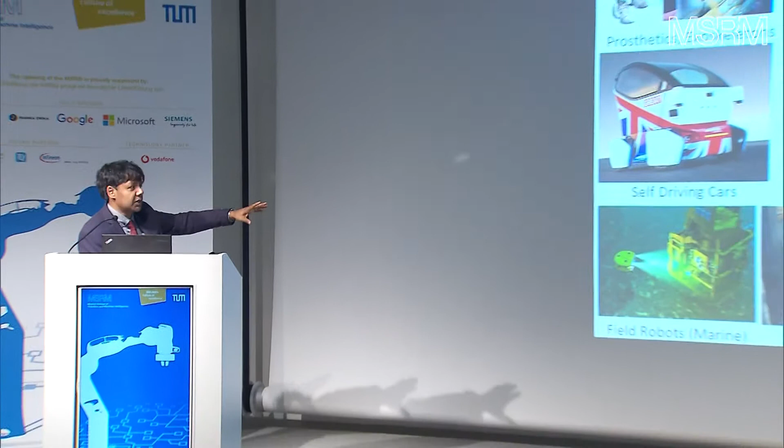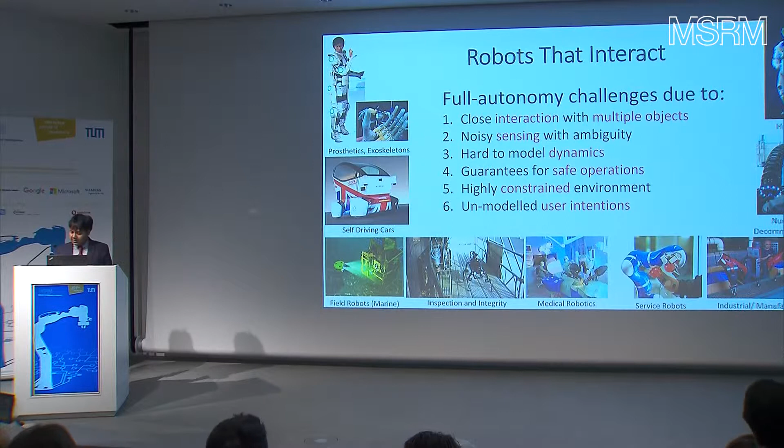What is different, and many of you have already addressed this, the classical ways of doing robotics has reached a limit because of many of these challenges. If you look across the domains, these are roughly the domains that Edinburgh Centre for Robotics works on. There are significant issues, if we wait for full autonomy to work in these systems, we're going to wait a long time. So to address these things, we've been looking at several domains.

What I'm going to do is give you examples of 3.5 projects, so I have time for 3, I think, and tell you a little bit about the science underlying that.

The first one is what I call shared autonomy for remote ops, or remote operations. You can imagine scenarios where you want to send a robot into a fairly dangerous radioactive setting. The whole point is you want to be away from the line of sight. You need to have scenarios where it works without reliable communication.

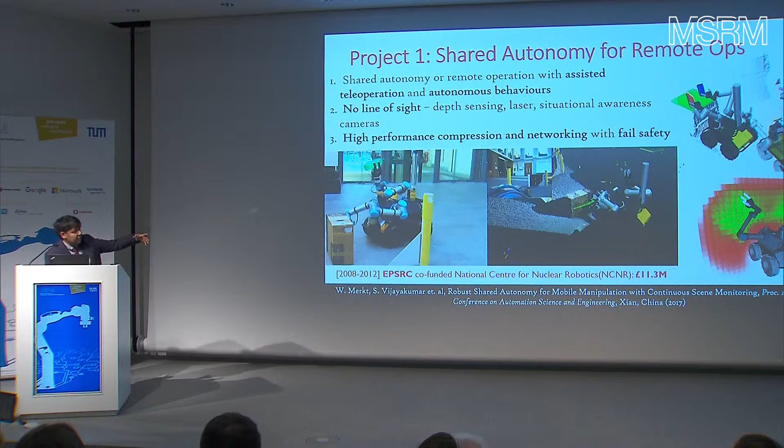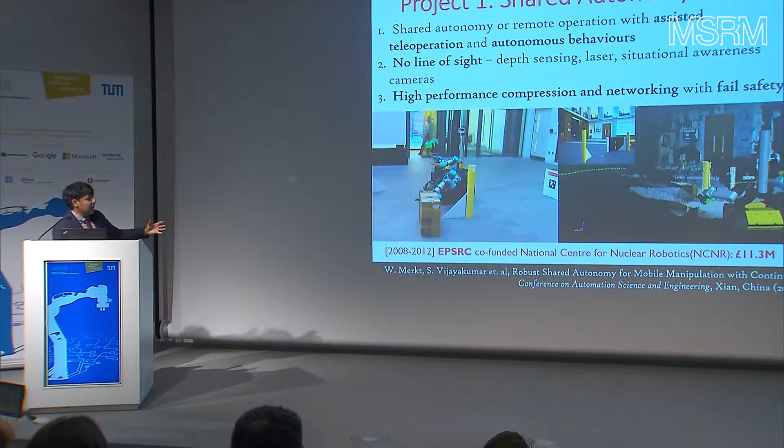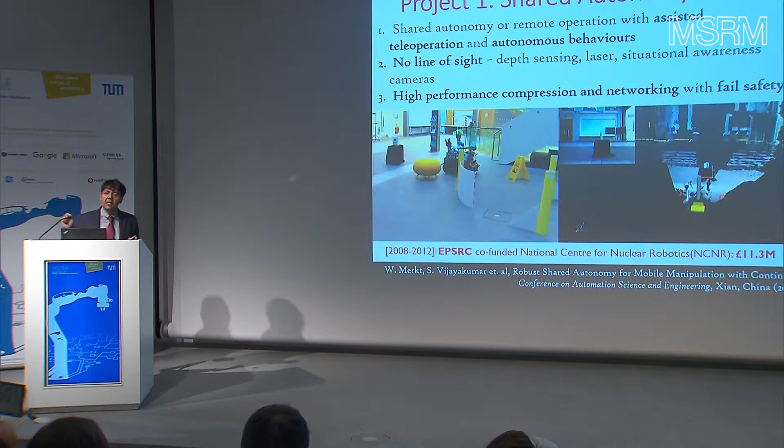On the right-hand side is a console that the robot is seeing. It builds a live state estimation of the world, and it does most of its actions autonomously. It decides for itself the path planning bit, figuring out which hand to use to clear debris, but the human is still in the loop trying to tell it which object it needs to grasp and where it needs to be put in.

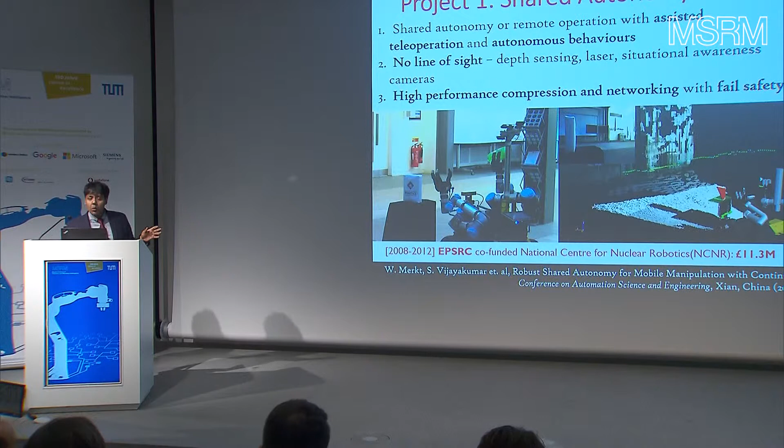So there is still a level of human-in-the-loop control happening in those scenarios. To make something like that happen, what are the core scientific technologies that we need to solve? Dieter already mentioned a lot of things today with respect to the sensing. You want to go from pretty raw sensing information—this is the view of the world through a robot's eye.

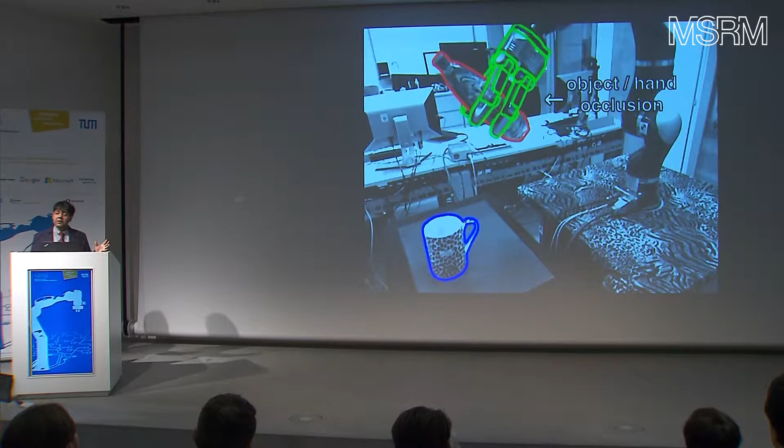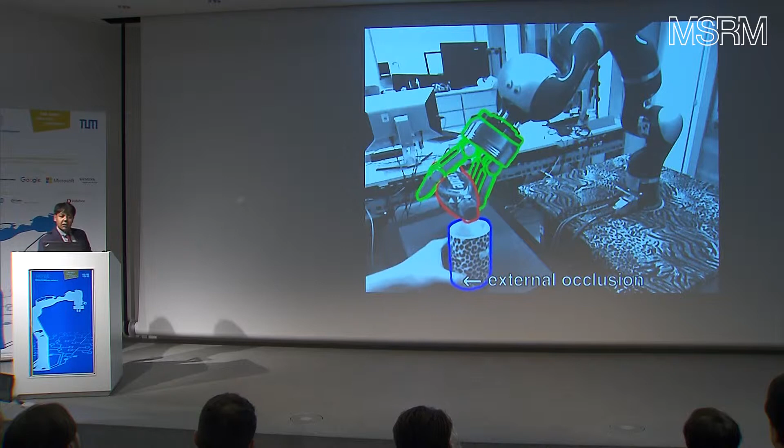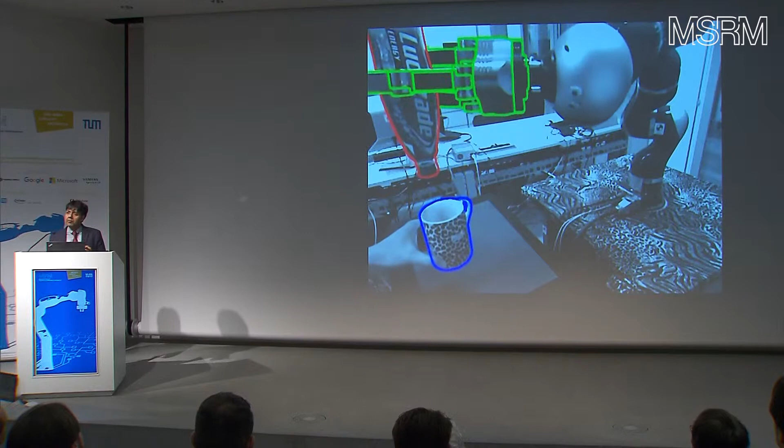You want to go from something like this to something like this, where we want real-time tracking. We want to be able to do, in this case, probabilistic model-based tracking. You want to do this under clutter, in the presence of significant noise, and also under motion, because you cannot guarantee that a camera is going to be still when it's on a robot's head.

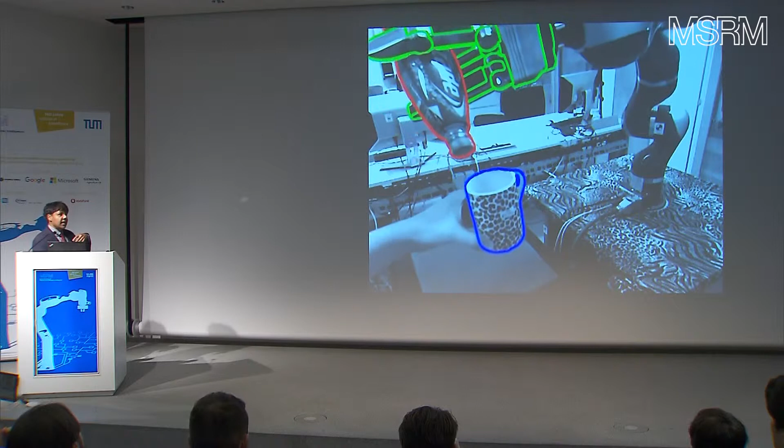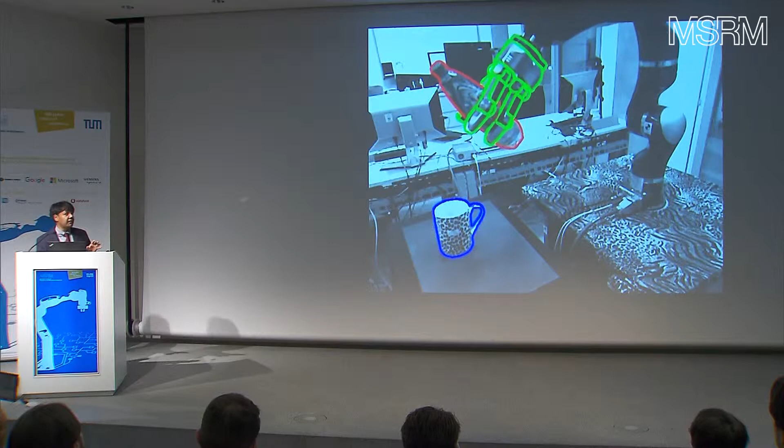So doing all of these things robustly, not taking ages, but doing this in real time so that you're able to adjust your actions on the fly, is a big challenge. Online real-time perception is a big challenge, and we are doing some bits of work towards addressing this.

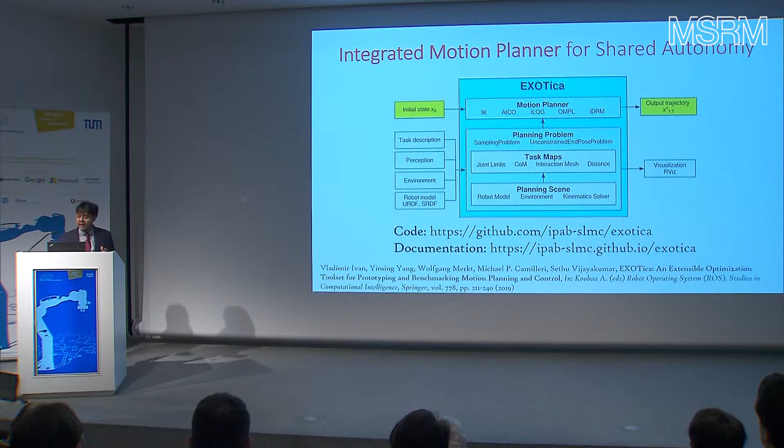We have specifically looked at a particular program of motion planning, which separates the issue of motion planning, the specification of the problem, and the planning scene. I encourage some of the young researchers here to go download this and try it out, because this framework enables you to try many nonlinear motion planning algorithms from different communities, but set up common motion planning problems and evaluate this across domains.

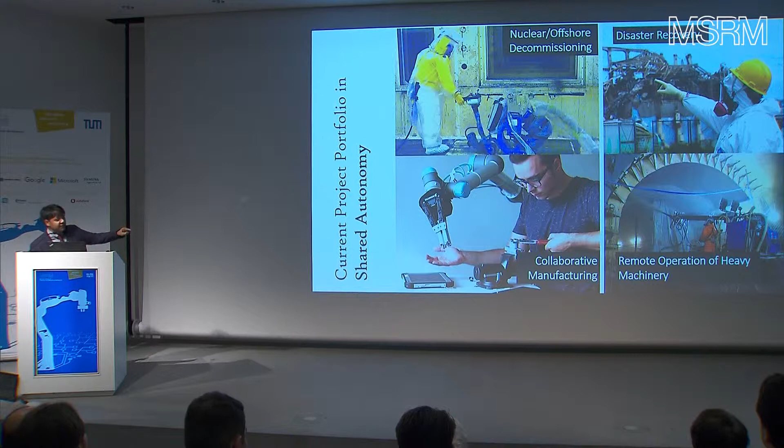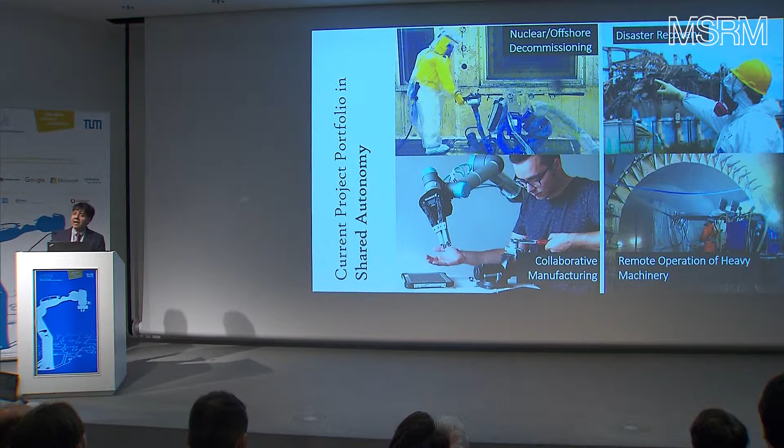Using these concepts, we've been doing many projects across domains. Specifically, I want to point out the one on the bottom right. If you go to London now, there's a big hole underneath London, part of the Crossrail project. We're working with some of the companies there to try and take some of those heavy machineries and make it idiot-proof, essentially doing this concept of shared autonomy, using real-time sensor data.

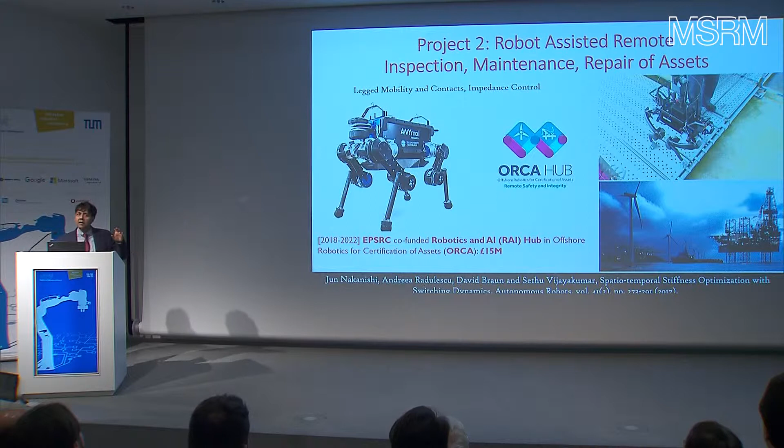The second project I want to focus on is something slightly more exotic in terms of the challenges. It's called the ORCA Hub. It stands for Offshore Robotics for Certification of Assets. It's about taking multimodal robots, robots that are topside, that are underwater, that are drones, and combining them to do things like asset inspection.

In our lab we do build some robots, but a lot of our robots come from great labs like ETH. This is the ANYmal from ETH, so we use those platforms to do real-time control, real-time motion planning, and robust motion planning with these structures. So again, look at the science underlying what needs to happen in such complex environments to enable this.

One of the concepts we've been focusing on is bridging the gap between robot speak and human speak. For that, we have found the concept of topology, a way of representing motions and relationships between objects and targets, very useful. Let me start by giving you a very simple example.

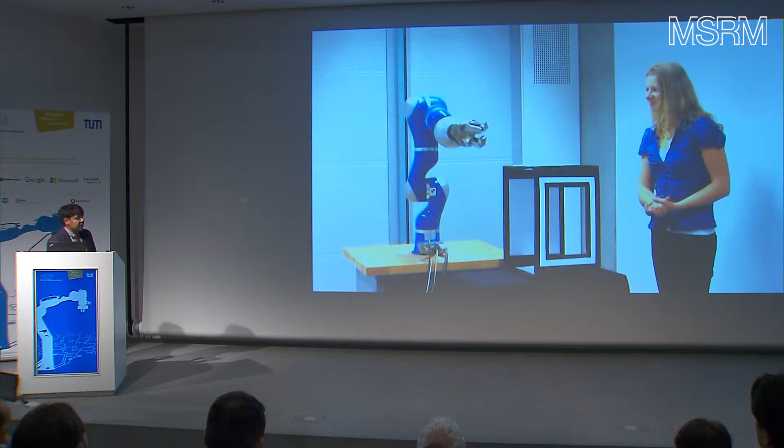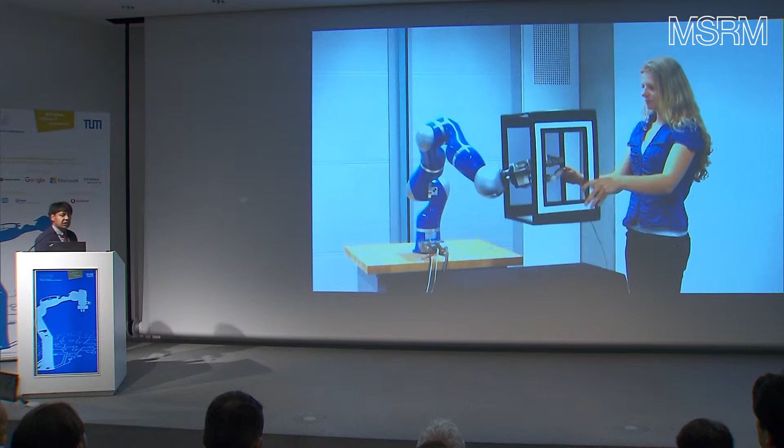To reach into a box, you can specify this target in n number of different ways. But if you use the concept of topology and specify targets by saying you want to move the topology from something outside the box to inside the box, there are certain advantages. If the box moves, then by using topological constructs, you're able to do very quick online remapping, because the concept of what is inside and outside moves with the box, and topological constructs help you do very fast replanning in this way.

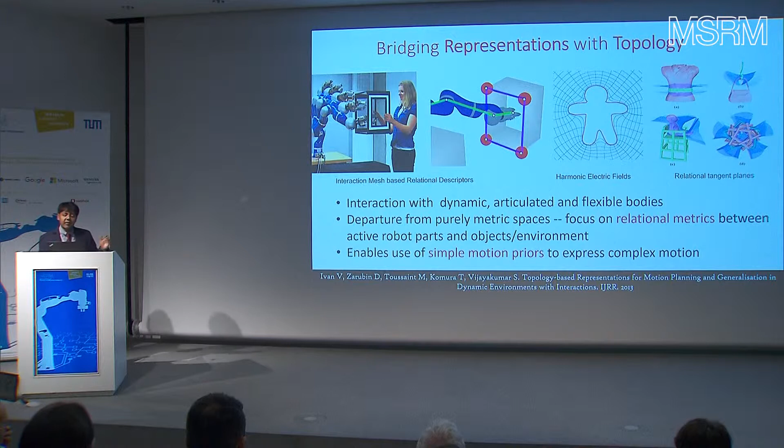And this is just one simple example. There are other ways of representing abstract spaces, like harmonic fields and relational tangent planes, as clever representational ways for generalizing. Of course, even if you have the best sensing and tracking, even if you have the best representation, the world is inherently uncertain.

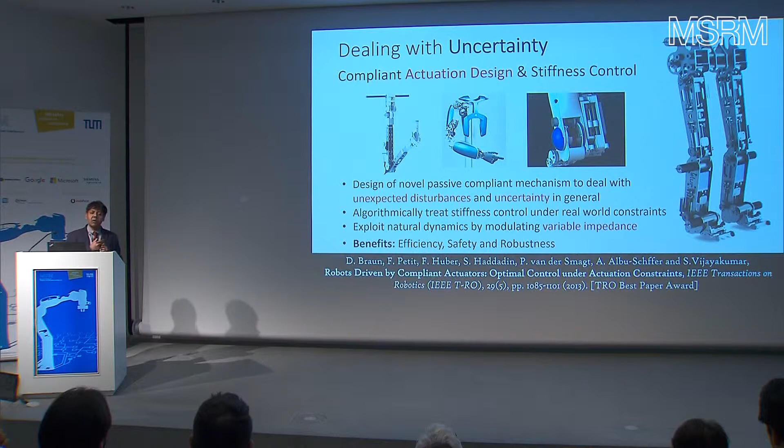It's got noise in the world. So we have worked with various compliant actuation systems. You've already heard a lot of talks today which focus on variable impedance and variable compliance. This is where I worked with Sami during his DLR days on looking at machine learning algorithms that are able to optimize variable stiffness trajectories.

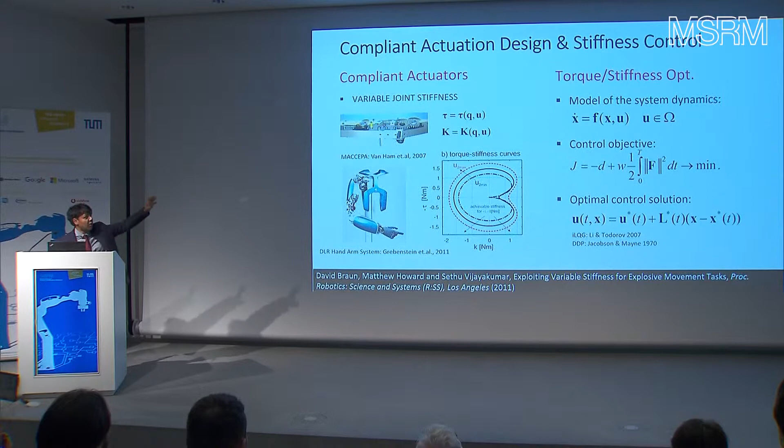In other words, not just the kinematics and the dynamics, but also optimizing the temporal evolution of stiffness profiles. I don't want to put too many equations on the slide, but fundamentally it is using compliant actuators, the classical ways of doing control, optimal control, model-based objective functions, the optimal controller. The only difference is we have now used the variable impedance as an additional dimension in terms of the redundancy, and solve that redundancy on the fly.

The way we do that is by using probabilistic inference as a way of solving these mechanisms. Why is this useful? It's useful because now you can work between abstractions. Remember, I said we can work with tangent planes, relational metrics, or topological constructs. You need to be able to move between these constructs on the fly, and these graphical models and variational inference methods help you do that seamlessly.

So what are the kind of things that we have done with it?

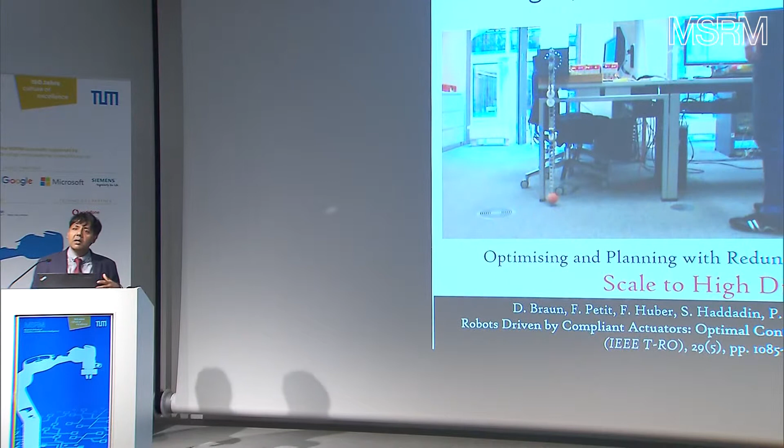So we've used some work to optimize stiffness trajectories. This is now two-link variable impedance systems which can pump energy into the system, modulate stiffness optimally in order to create, in this case, maximize throwing performance.

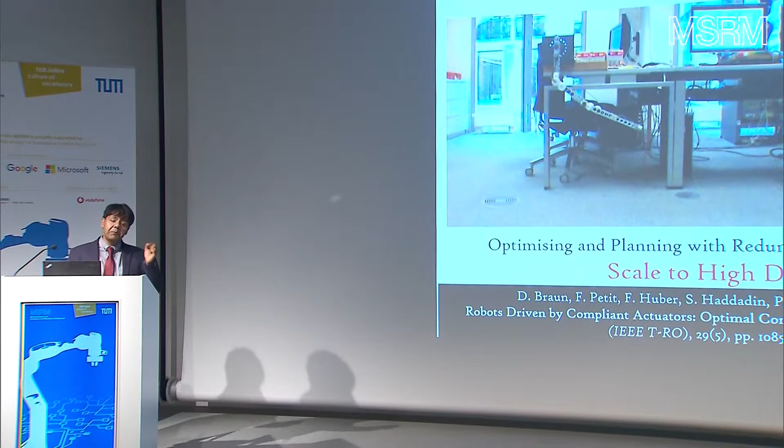In this case, it is maximizing the distance thrown by pumping energy into the system. So what we've done here is we have optimized the scheduling of the stiffness properties using purely optimization techniques. This is work at Sami's place in DLR, where we tried to scale that up to a big system, the hand-arm system that again you've seen in some other labs. So algorithmically trying to optimize the stiffness profiles.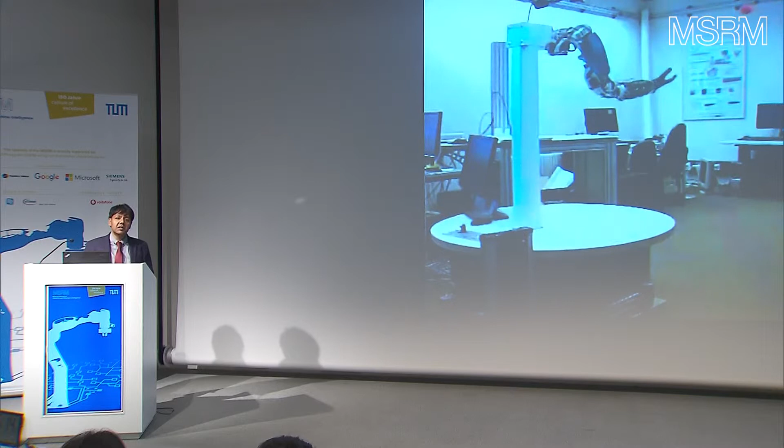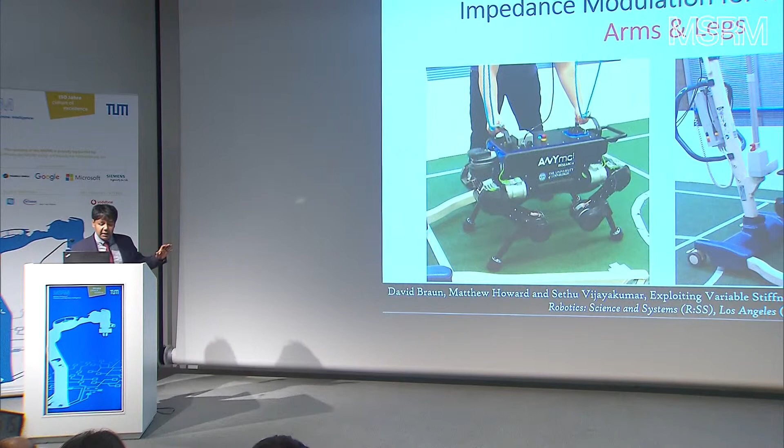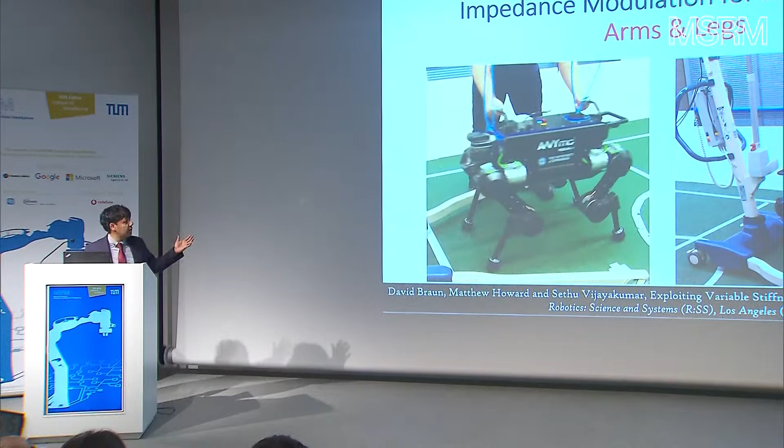Now we've been trying to take this principle and apply it to various series elastic actuators that we have in our labs. So for example, we now have the ANYmal platform on which we are trying to, again, optimize stiffness profiles. Some of Antonio's students are visiting us, working on some of those platforms as well.

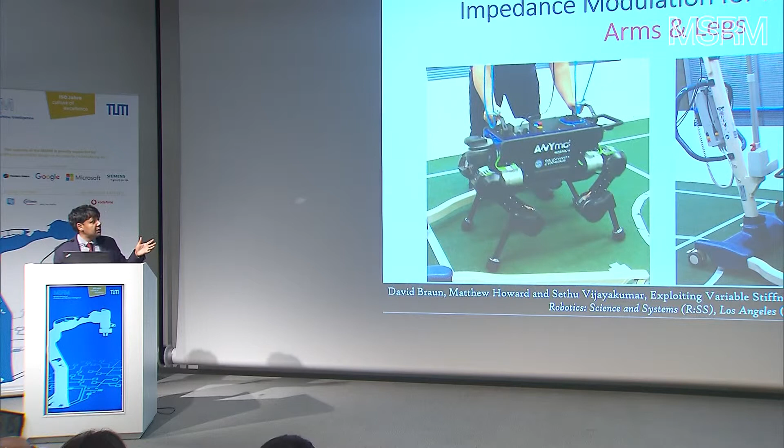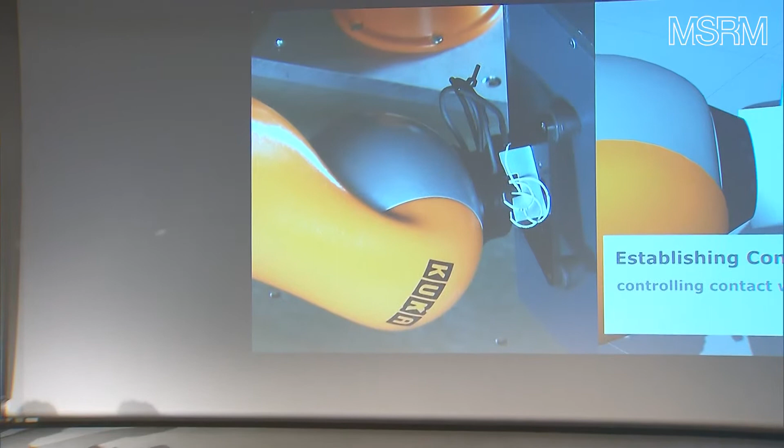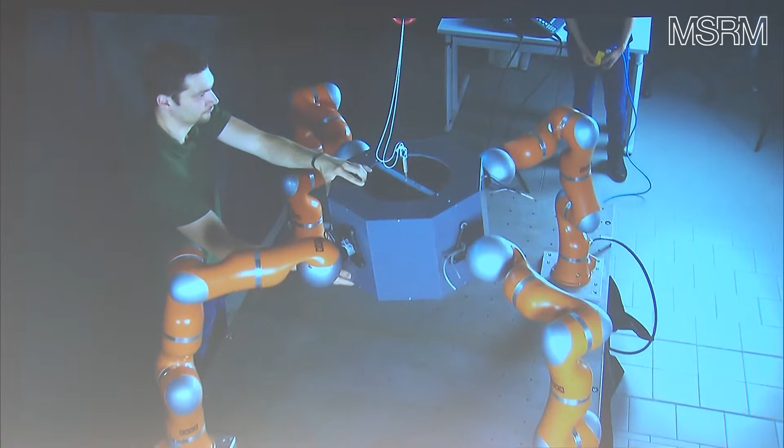And more importantly, the adjustment of the stiffness profiles helps us do various tasks. This is work coming out of Mike Mistry's group, who is also in Edinburgh, trying to look at establishing contact, controlling wrenches, but doing this kind of distributed force impedance profiles in collaborative settings like this. So that is hugely important for scenarios where we want to interact with multiple robots and humans, still humans in the loop.

So this is what I meant by shared autonomy - sharing control and interfaces with robots.

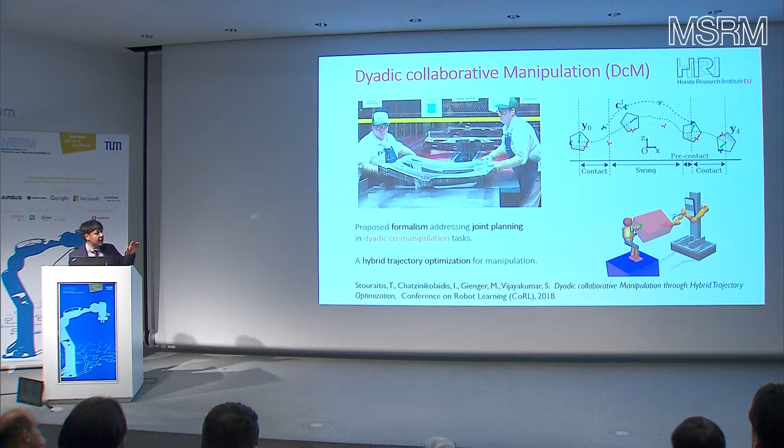So we've recently also just started a very exciting new project. I saw a couple of people already talk about dyadic collaborations, dyadic manipulation systems. This is some work that we've just started, and we've had some first results. It's going to be presented at CoRL next week on not just doing trajectory optimization and optimization of dynamics, but also doing...

We are also adjusting contact locations and timings. So we are doing a continuous optimization of trajectory profiles as well as breaking and making contact, and using this not only as a way of collaborating, but also a way of, if you can predict user intentions, trying to use this in a collaborative fashion.

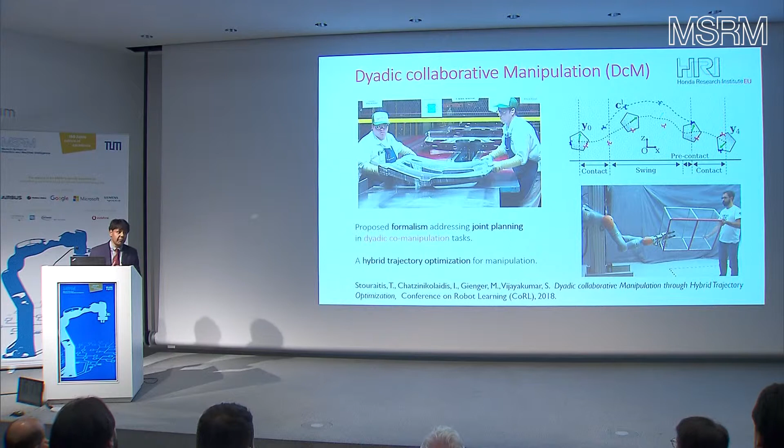So user intention prediction is still a very, very hard problem. But if we assume we are able to do that, we can optimize movements in collaborative settings.

And why do we care about this? Because we want to work with things like - I think a bunch of our colleagues, including we have a project with LAAS-CNRS with Airbus on collaborative manufacturing settings.

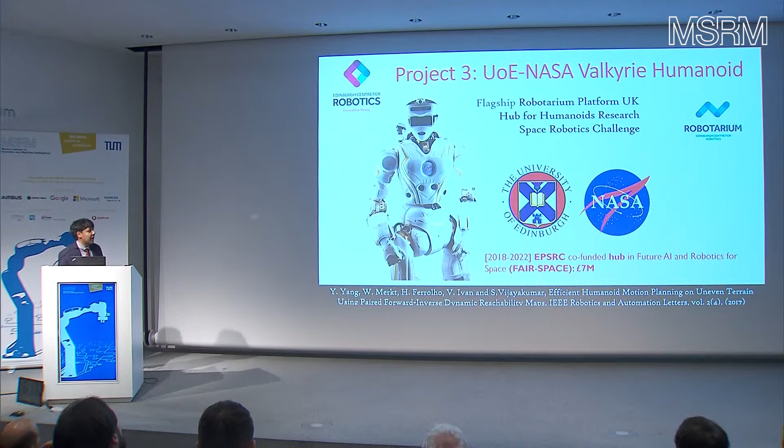Okay, so the other project I want to briefly mention is the work that we're doing with the Johnson Space Center using the NASA Valkyrie platform. It's an exciting platform, but it's also a difficult, complex platform to work in. So we are a very small part of a big journey that NASA has.

This has changed in the last few months. It's gone from going to Mars to pivoting to the Moon as a staging point, but the scientific problems that need to be addressed still remain.

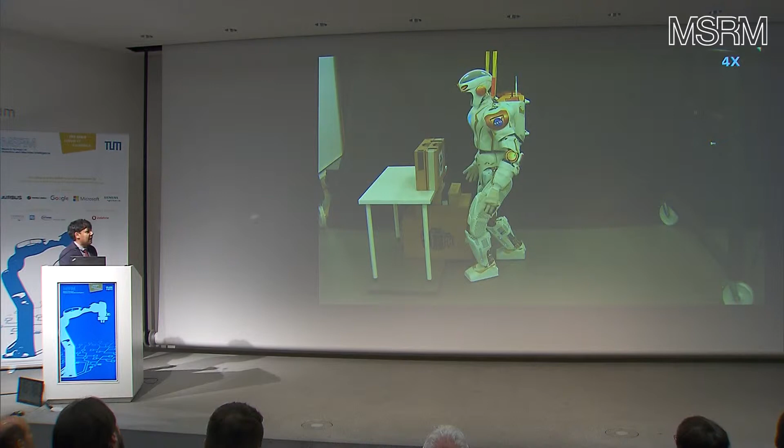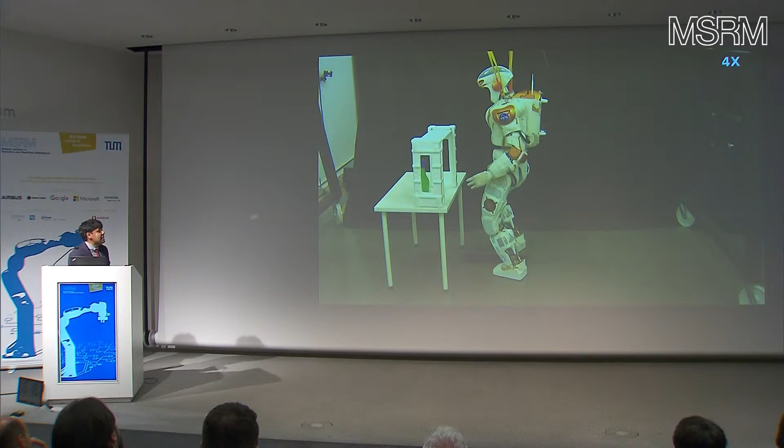It's about getting robots like these doing fully autonomous footstep planning, placement, and adjustment of final pose and gait in order to manipulate the poses so that it is able to adjust its location in order to grasp in complex scenarios, in clutter.

So what is important is the robot uses its live sensing to figure out the poses it needs to be in, using these multiple supports to do this kind of navigation and manipulation. Again, fully onboard sensing. You'll see in a moment the...

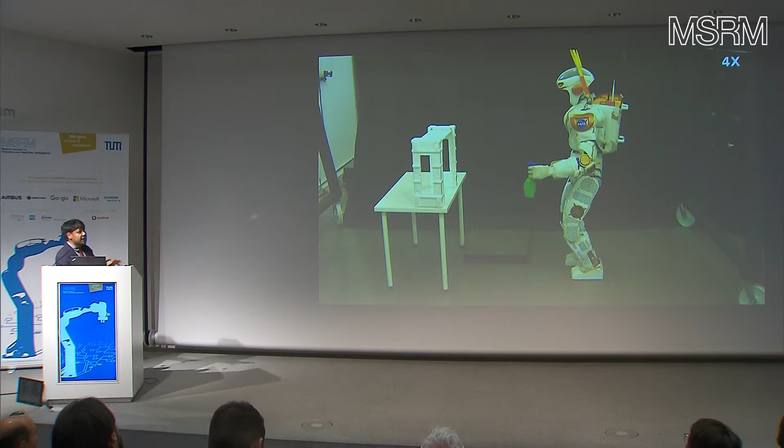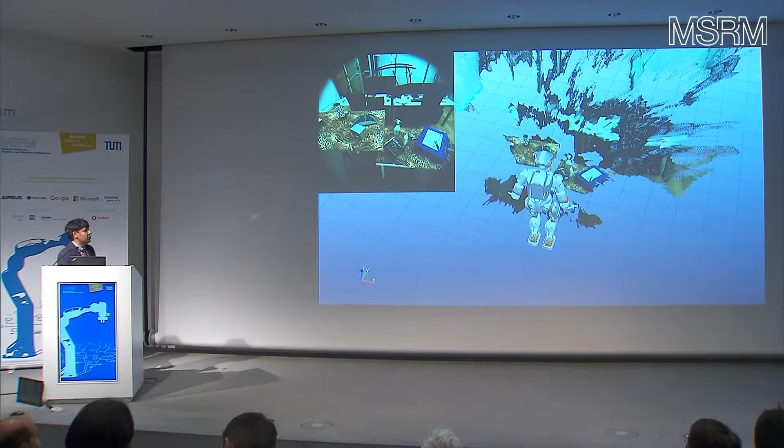Work that we had to do in terms of getting the live sensor feed and the motion building, as well as the SLAM aspects - again, sensor drift is a massive issue. Using work that a bunch of students, including Raluca, who works with Daniel, has been doing on motion building from live sensor data to do optimal planning.

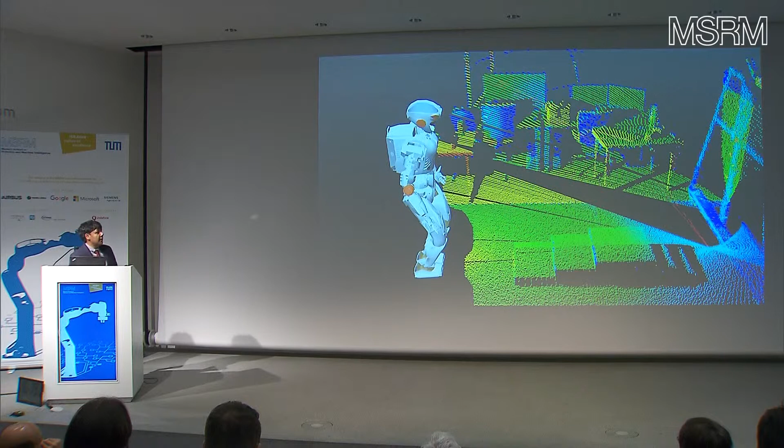So you'll see also in a moment the live sensor feed for, in this case, N-step, look-ahead, footstep planning on these platforms.

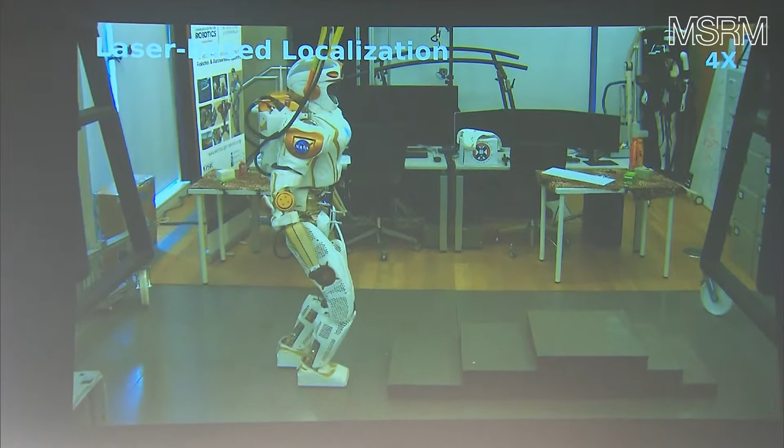So it's quite a new experience for me trying to build full systems, all the way from sensor to perception. But that has taught us quite a few lessons in terms of where to go.

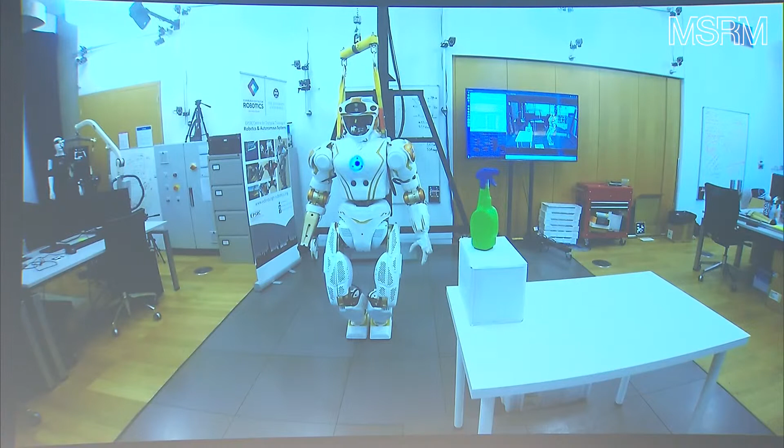Recently, we've also been looking at navigation on uneven terrain and locomotion on uneven terrain, using live sensor data. I've cut short this video for time, but typically, depending upon the slope and the affordances for footstep placement, it changes its gait and locomotion position to grasp objects.

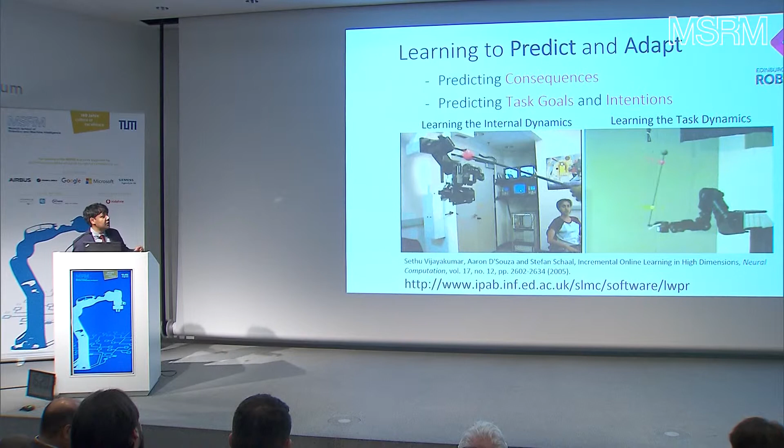Okay, so this is historical work, from my PhD, with Stefan and Jan and many others. But this is still so relevant because I still feel there's a lot to do with data-driven learning of dynamics, trying to use existing models, but also trying to use live data-driven innovation to adjust the models that we learn.

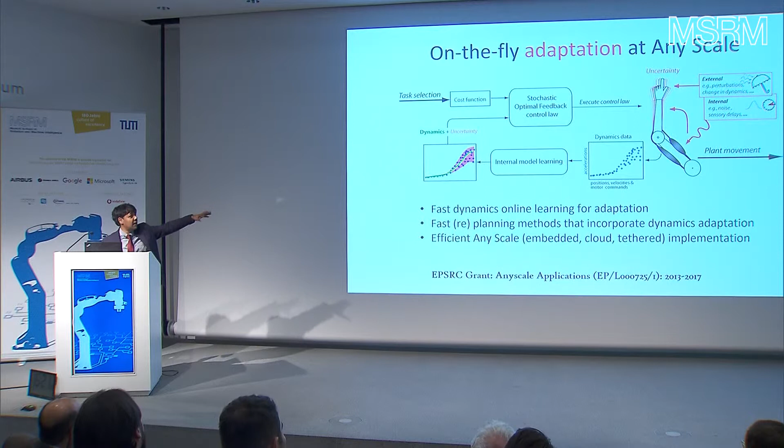Here's an example of this work from my PhD, where we did a data-driven way of learning dynamics of the arms, but also learning task dynamics to balance a pole, learning control policies on the fly using data-driven methods. The way we use it now is we put it inside the optimal control loop, so rather than taking analytical models, we put it in the loop to adjust the control laws.

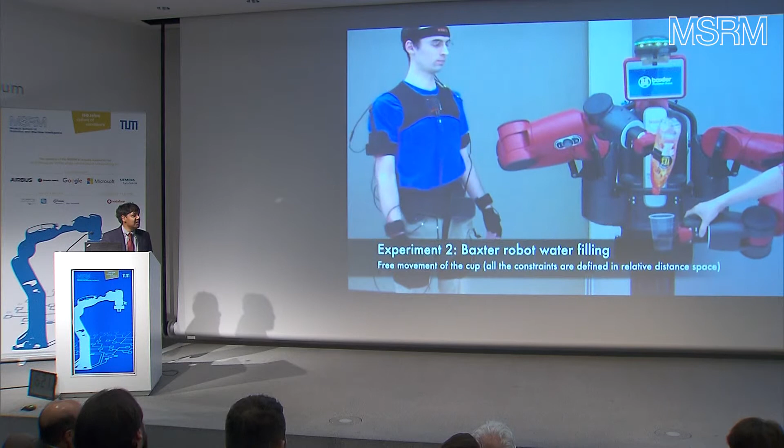I don't think I have time for this, but come find me if you want to see this fun video of manipulation in null space, bringing all of these things together.

We also work in prosthetics. I don't have time to go much deeper into this, but we work with upper limb prosthetics with Touch Bionics, and lower limb prosthetics looking at gait metrics for evaluation.

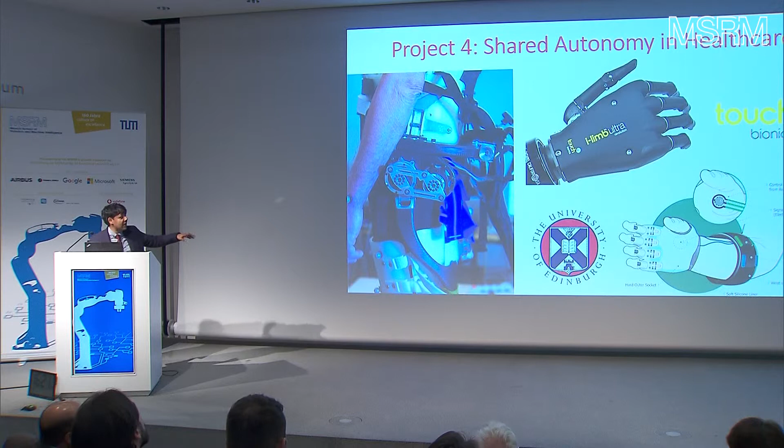But I want to finish by giving you a little bit more insight into the center that we run. And I think this may be perhaps a few hints for Sami—there are some problems, there are some wonderful successes, but it's a challenge.

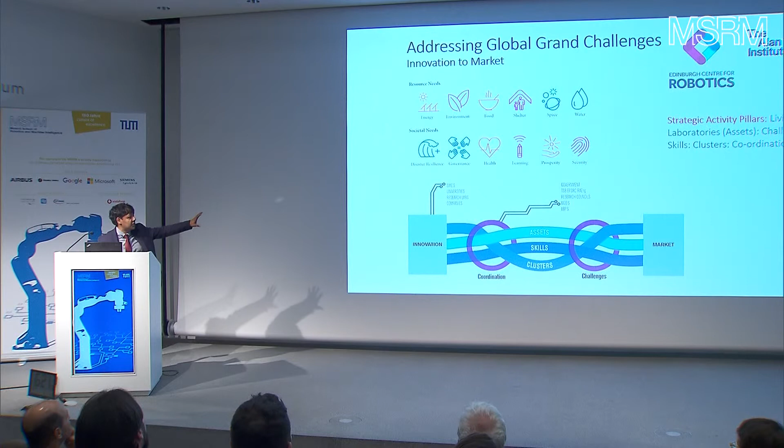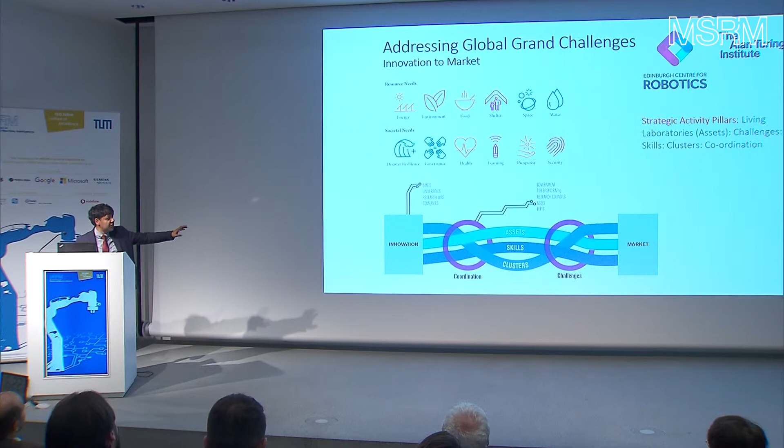So we want to address some of the global challenges by taking innovation from labs to market through 3 strands: working with world-class assets, working with world-class PhD students—that's the skills bit—and working with government for clusters. This is extremely important to make our research successful. So just breaking it down: assets, skills, and clusters.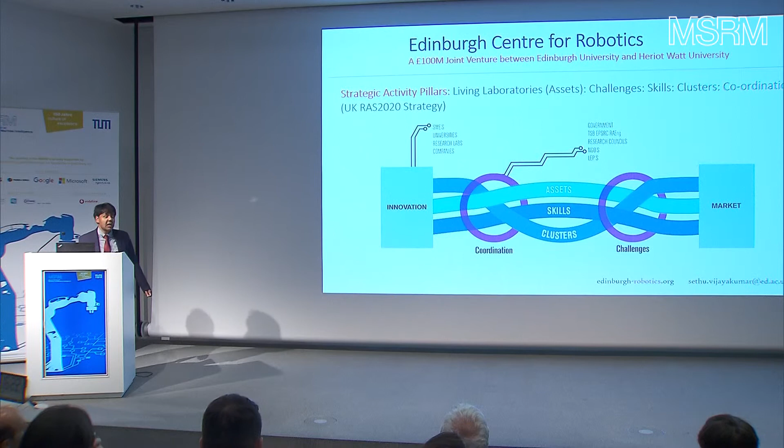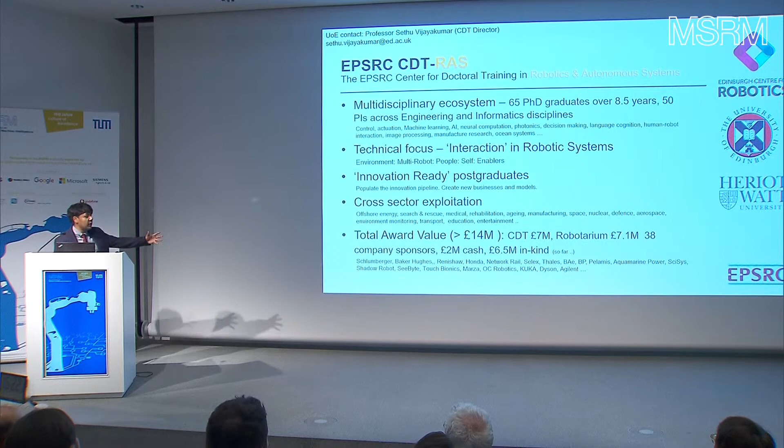So what are these assets? What are the skill sets? We train our PhD students in robotics. We have about 65 odd PhD students working with companies very closely—it's called the Center for Doctoral Training. We work with world-class equipment, and the government has been massively supportive for that.

Lastly, I want to finish by putting on another hat. Recently, I was given the massive privilege and opportunity to marry my 2 passions, machine learning and robotics. I've just taken over as co-program director of the Alan Turing Institute, and many of you have told me that we should talk about AI and robotics together—that's what we're trying to do there.

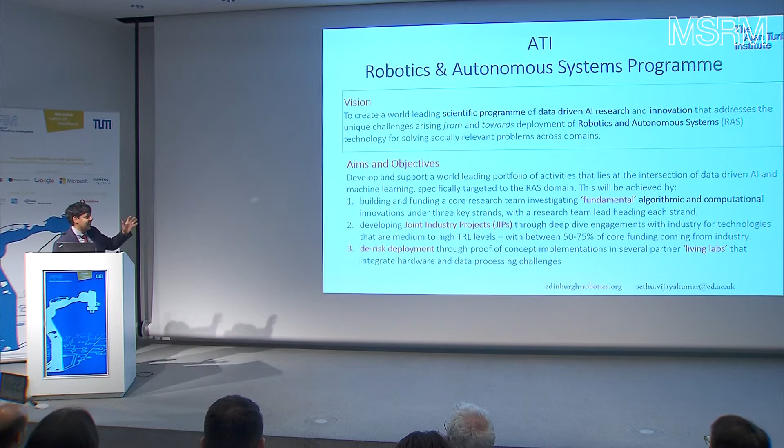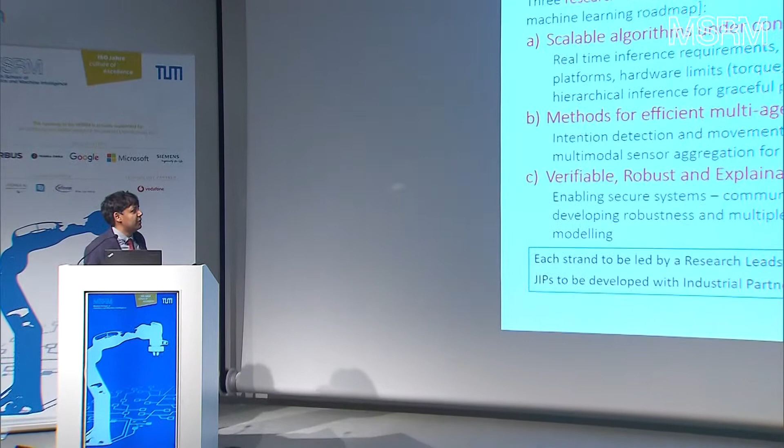So the take-home point is, in the Alan Turing Institute's RAS program, Robotics and Autonomous Systems program, we're looking at 3 key areas: scalable algorithms under constraints, methods for efficient multi-agent computations, and verifiable, robust, explainable decisions for assets. We definitely don't cover all of these things, but we're hoping to have world-class experts who can come work with us on this journey.

To be able to do that, we've been doing things like setting up living labs in the newly opened Bayes Centre. 10 days ago, we got 2 new floors of robotics facilities at Edinburgh. Please come and visit us, and I'm looking forward to further collaborations with Sami and the team.

And I want to end by quoting one of my favorite authors: we tend to overestimate technology in the short term and underestimate technology in the long term. That is indeed the case with robotics. So we have to cut down on the hype, look at the challenges, and make steps forward.

So Godspeed to Sami, and the Munich School of Robotics—I'm sure you'll do a great job. Thank you.